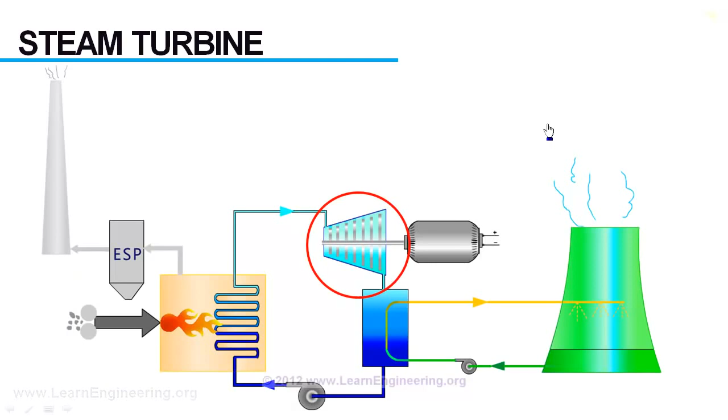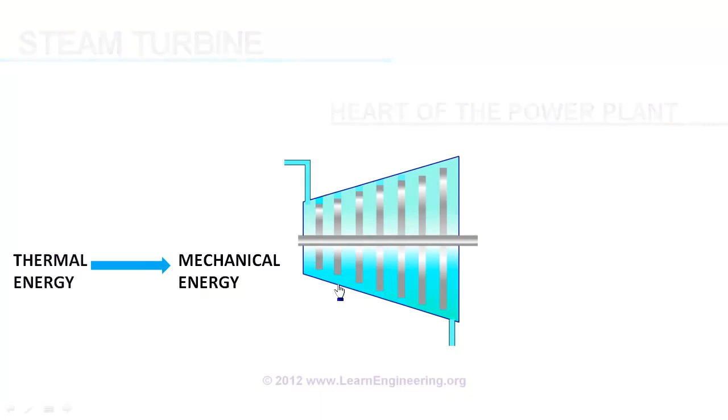In today's video, we will understand the working principle behind a steam turbine. Steam turbines are considered the heart of the power plant, because this is the device which converts thermal energy from fluid to mechanical energy, more precisely rotational energy of these rotors. So a series of such rotors, which absorb the fluid energy by virtue of its rotation, are the most vital component of a steam turbine.

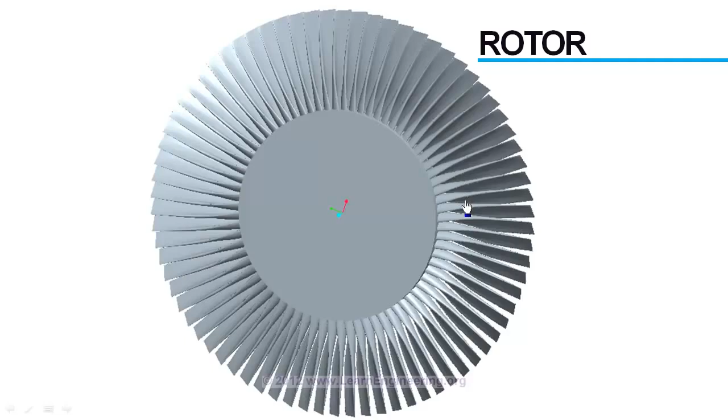Let's have a close look at one such rotor set to understand more about its working. Here it is. This is one rotor set, and you can see there are a series of blades connected to the hub of the rotor. In different orientations it will look like this, or like this.

If you take a close look at one of such blade, you can observe one thing. This blade is a collection of different airfoil cross-sections set together, which vary in size and shape from bottom to top.

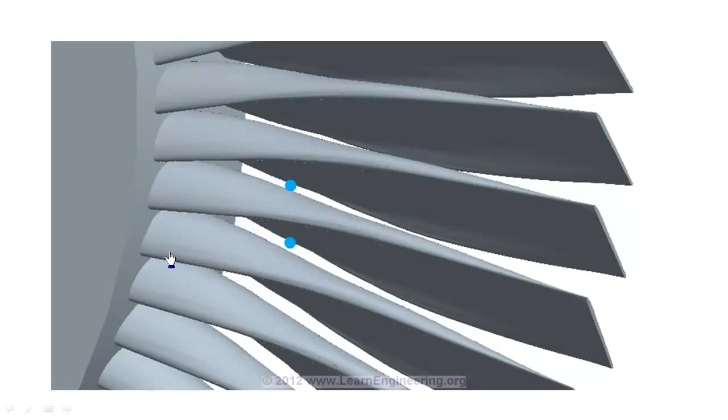When high-energy steam at inlet, with high pressure and temperature, flows over such a blade, it will induce a pressure above and below the blade. Thanks to the special shape of the blade, the pressure above will always be less than the pressure below. So there will be a resultant net force acting in the upward direction. This force will make the blade rotate, in this manner.

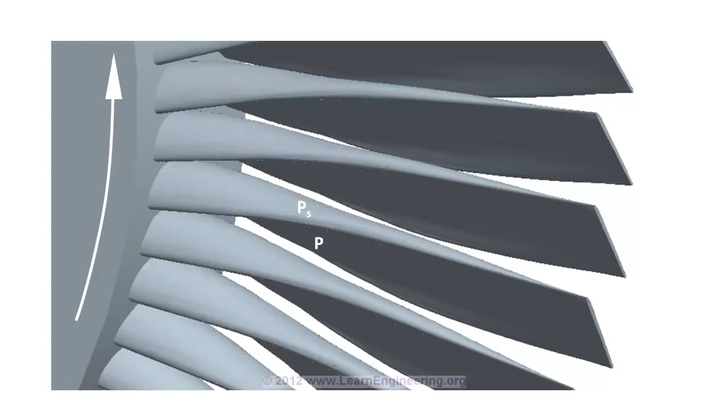As the blade rotates, it absorbs some energy from the fluid, so fluid at exit will have lesser energy compared to inlet. In the coming session we will see how we can predict the energy transfer in fluid. But before that, we will have a brief look at energy associated with a flowing fluid.

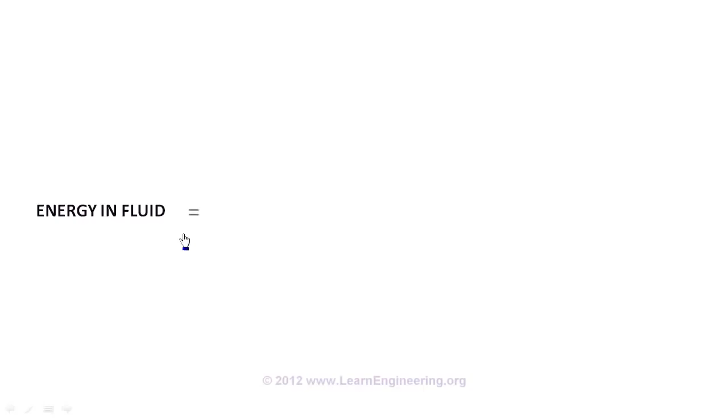There can be three components of energy for a fluid. First, due to its velocity, the kinetic energy part. Second, by virtue of its pressure, the pressure energy. Third, by virtue of its temperature, the internal energy.

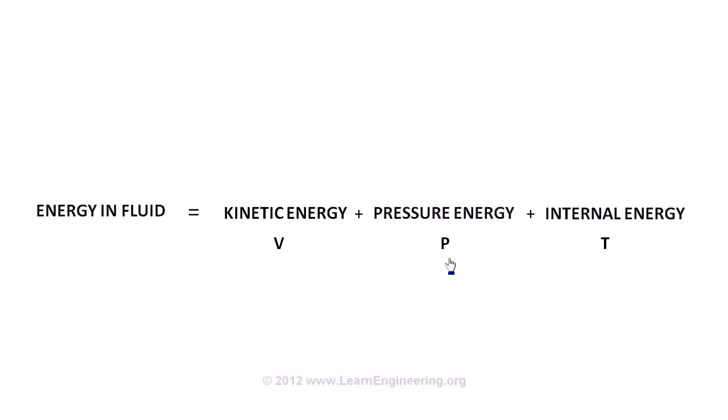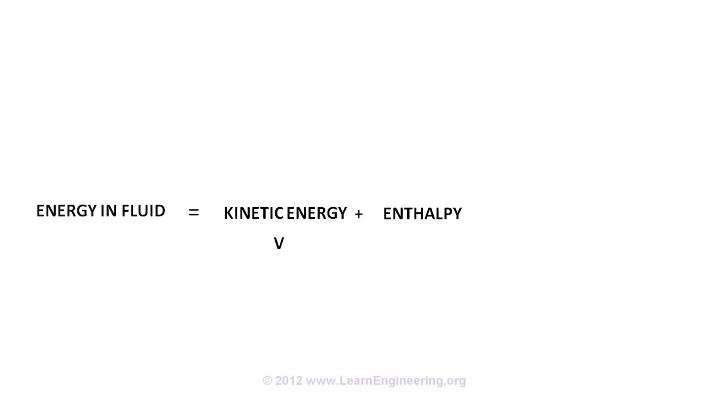The last two components, pressure and internal energy, can be combined and called enthalpy. If a fluid has a high enthalpy value, it means it has high pressure and temperature. Now we will see exactly how a steam turbine absorbs energy from steam.

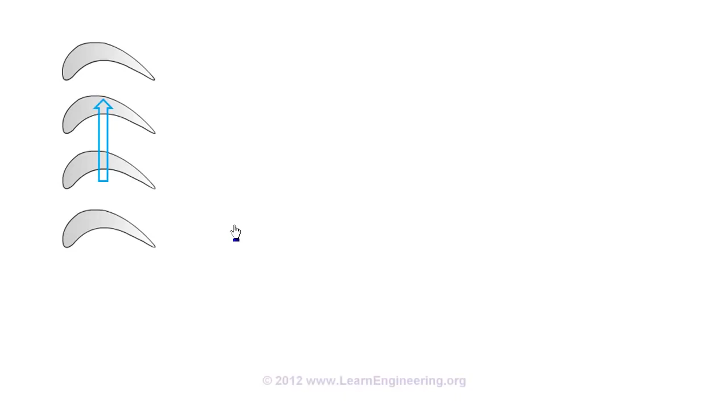This is the rotor cross-section of a blade at a particular length. As the steam passes over the blade, it will rotate in this direction, and this will result in energy loss to the fluid. For a typical steam turbine, both kinetic energy and enthalpy come down.

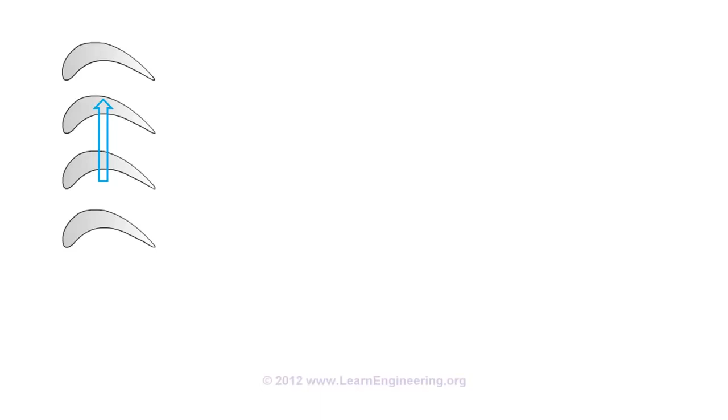So if you plot velocity of steam from inlet to outlet, it will be like this. As kinetic energy decreases, velocity decreases. Similarly, enthalpy also decreases, like this.

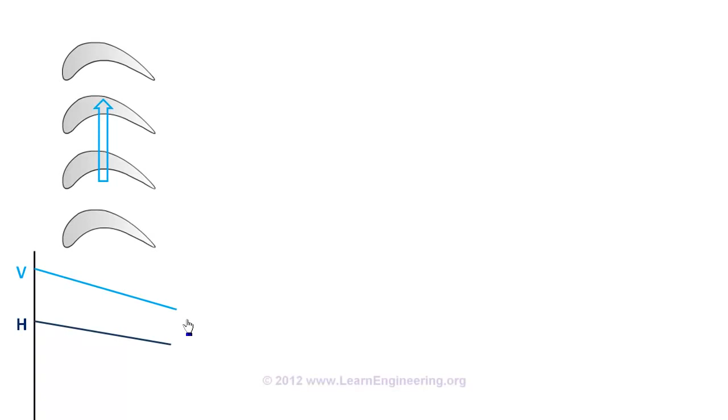Now the next step is to pass this steam to the next stage of rotors. But if you directly pass steam to another set of rotors, it won't absorb much energy, because here the velocity of steam is already very low. So before passing the steam to the next rotor, you should increase the velocity first.

For that, we will use something called a nozzle, a stationary device attached to the casing of the turbine. They are also called stators. Stators are also a set of blades, but these blades are stationary. They don't take part in energy transfer. What they do is simply transform energy from one form to another, more precisely transforming enthalpy energy into kinetic energy.

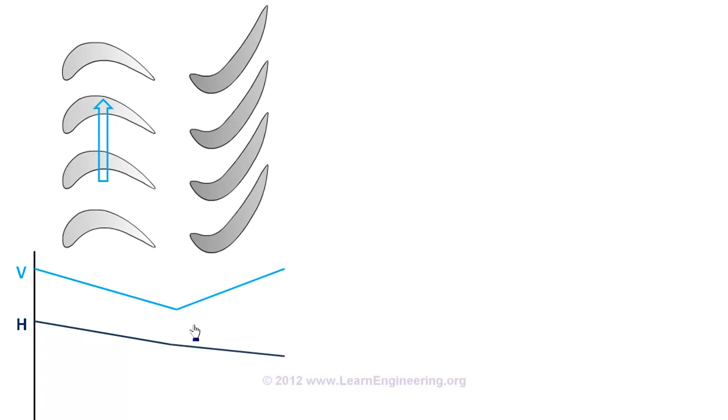You can see the cross-section area of the nozzle decreases with flow, so due to its special shape the velocity increases. But at the same time enthalpy decreases. If you sum the change in enthalpy and kinetic energy, there won't be any net change.

Now we have increased the velocity of fluid, so we can put the next set of rotor. Again stator, and again rotor. So in a steam turbine there will be alternating sets of rotors and stators: rotors which are moving, attached to the hub, and stators which are stationary, attached to the casing of the turbine.

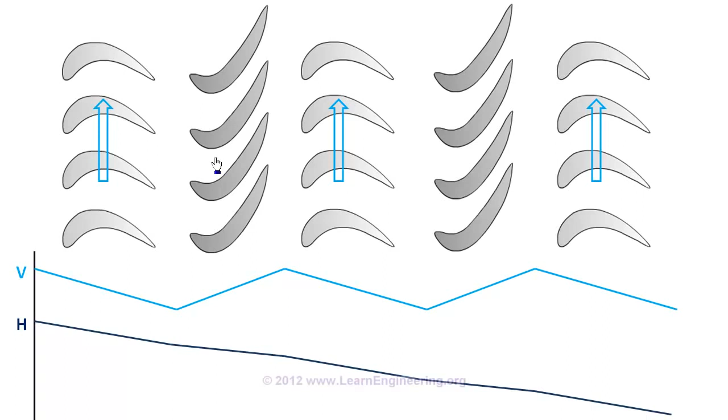Now, we will have a close look at energy transfer at the rotor. If you sum kinetic energy and enthalpy energy change across the rotor, you get the total energy transferred. What could be the contribution of each of these terms? Is it possible that enthalpy energy change is zero while kinetic energy still contributes to the energy transfer, or vice versa?

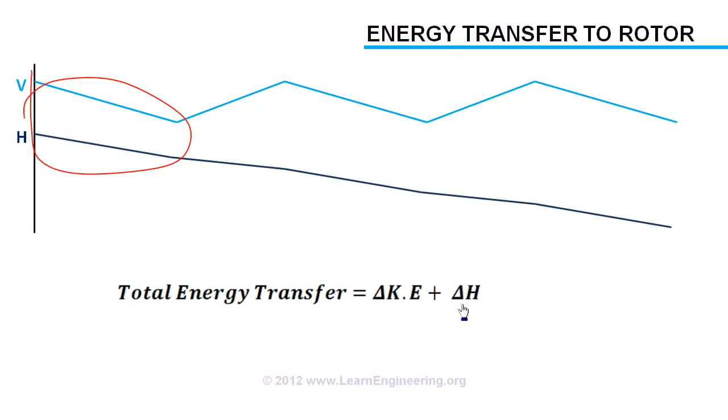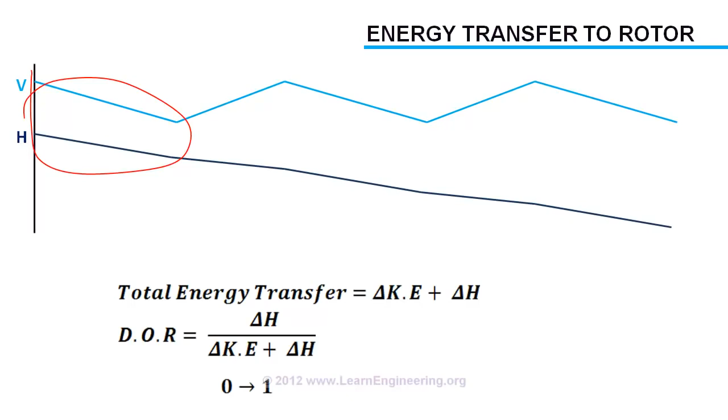Suppose for a turbine the degree of reaction is 0, then such turbines are known as impulse turbines, or 0% reaction turbines. In such cases, enthalpy energy change across the rotor will be 0, and energy transfer will be purely due to kinetic energy change.

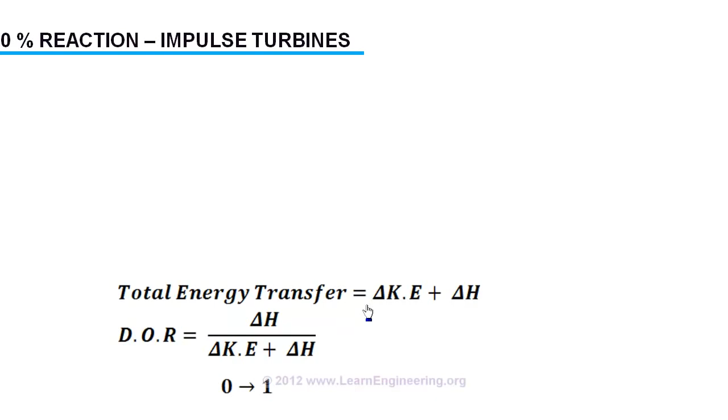We know along the blade enthalpy doesn't change. Along with enthalpy, temperature will also remain the same, because enthalpy is a direct function of temperature assuming steam as an ideal gas. There will be a slight drop in pressure, but you can almost assume pressure is the same across the rotor. The only quantity which changes here is the velocity.

Here fluid passes through the blade without actually hitting it. We know across the blade there is no kinetic energy change, so the absolute value of velocity remains the same across the blade. But pressure, temperature and enthalpy vary across the blade.

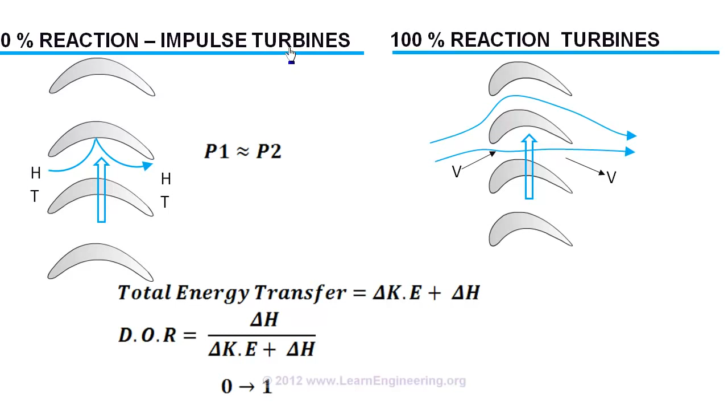A practical steam turbine will be a compromise of these two cases. People usually use a 50% reaction turbine, known as a Parsons turbine. That is all about the working of steam turbines. Thank you for watching the video.